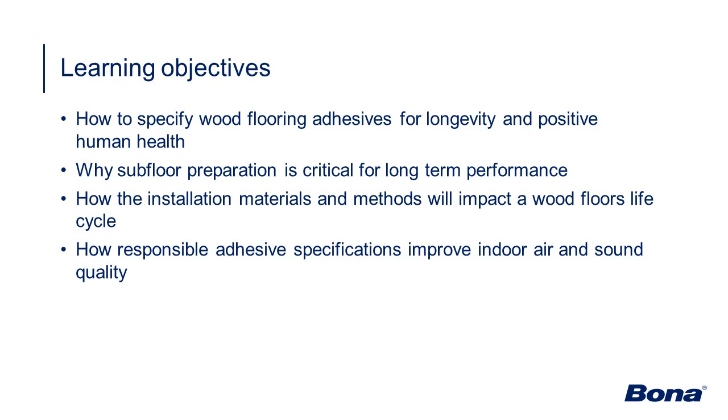So, whose procedures do I follow? The Wood Flooring Installation Guidelines, or the NWFA guidelines. The National Wood Flooring Association is an international nonprofit trade association representing all segments of the hardwood flooring industry. As a matter of fact, they just changed their installation guidelines in 2019. I think they're up to 180 pages now. Most adhesive manufacturer instructions are maybe 1 to 2 pages.

So who defines what's proper and who's to follow? Anytime that they're not in concert, the manufacturer guidelines always trump the National Wood Flooring Association guidelines. And in any case, proper preparation coupled with proper installation materials yields proper positive results.

So we're going to talk about moisture and moisture's effect on hardwood floors. And no matter where you called in from today, flooring can be successfully installed. It's perhaps maybe just in a different manner. The challenges of a flooring project in Florida might be completely different than the challenges of a project in Arizona.

If we're dropping wood off in Florida to acclimate, it's likely we're trying to wait till the moisture content in the wood comes up and becomes higher. If we're dropping the floor off in Arizona to acclimate, it's also likely that we're leaving it on the job site so it comes down in moisture before it's ready to be installed.

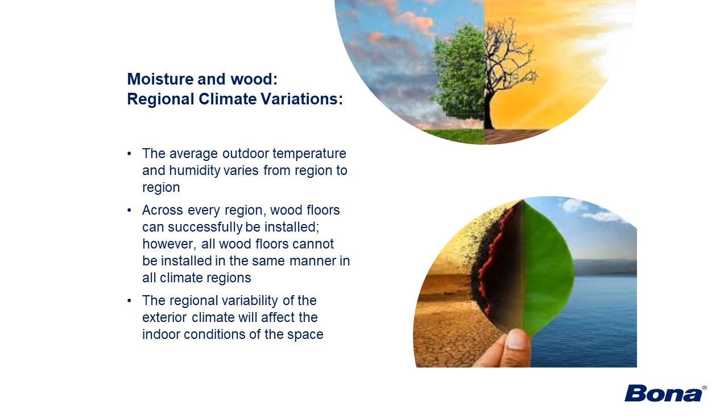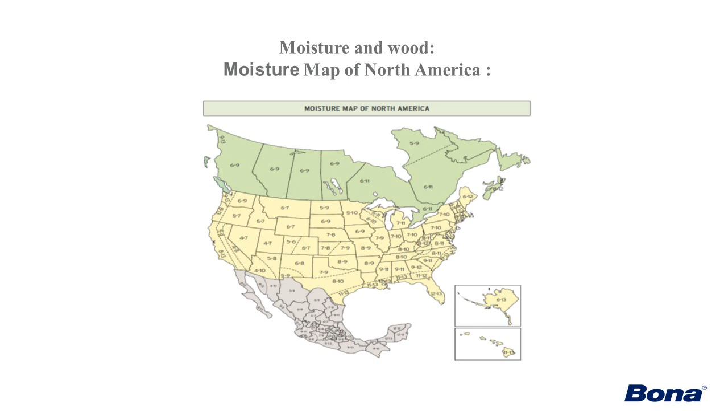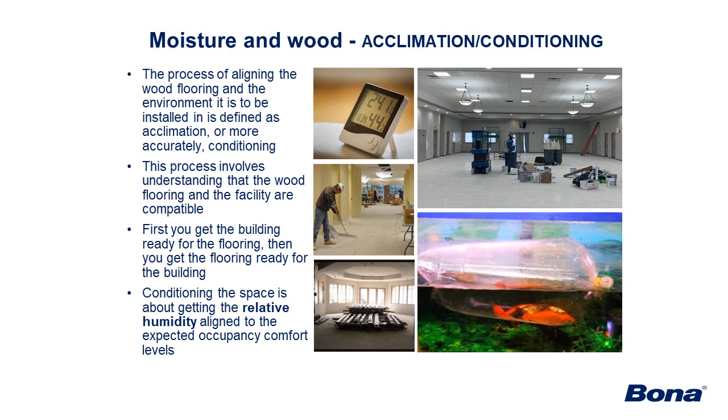I've seen sometimes job sites that are 1,000 square feet and not acclimated at all. So, and by the way, acclimation is not a time thing; it's a science thing. Some people say, well, I let it sit in there for 3 days, or 5 days, or 7 days.

I talked about the National Wood Flooring Association's guidelines. It's about 180 pages. I actually think this is perhaps the most important page. The ideal moisture of wood flooring will be the moisture content at which the wood reaches equilibrium with the installation environment. At this equilibrium, moisture content will stop absorbing or shedding moisture, which prevents some of the physical problems that can occur in wood flooring.

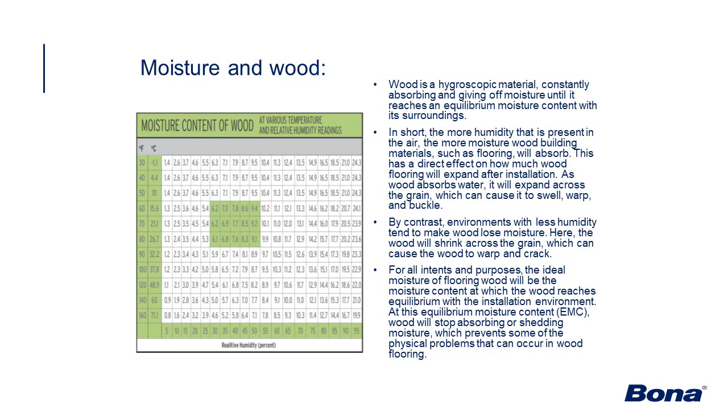So in every market, we're looking for that temperature and relative humidity sweet spot where the wood is going to live comfortably. And that's called the dimensional change coefficient. Every species is assigned a dimensional change coefficient. In other words, maple certainly does not expand and contract at the same rate that oak does.

Brazilian cherry flooring moves dramatically different than say, a walnut floor. But we can determine now, depending on the species of the wood and the environment we put that species of wood into, what it's going to do. And by looking at the dimensional change coefficient, we can determine that if we put it into a room with 62 degrees temperature and 48 percent relative humidity, what that floor will actually do.

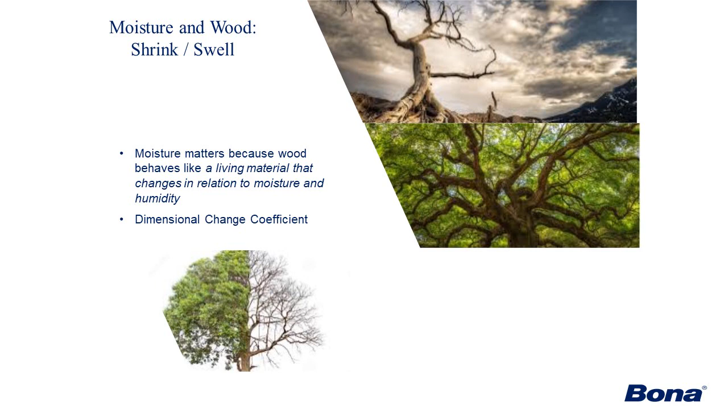Moisture in wood. So never install a wood flooring over a known moisture condition. It is compulsory practice to always test for moisture regardless of conditions, so that the unknown condition can then become a known condition and can be handled appropriately.

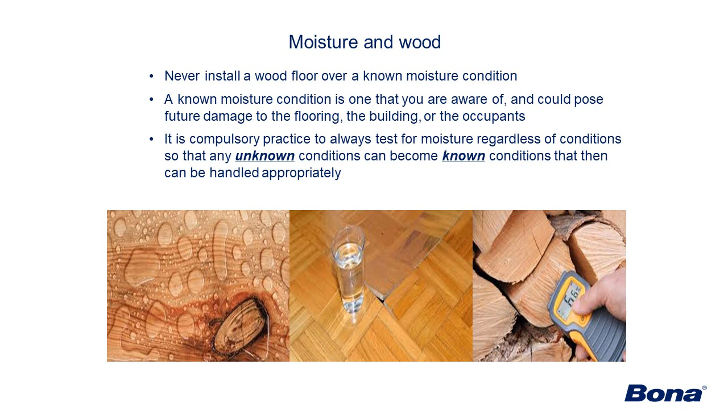I made a living as a contractor, and I tried never to break 2 rules. One of those rules is, if my eyes don't see it, then I don't believe it. And number 2 is never rely on someone else telling me the conditions have been checked and you're good to go. One of the reasons for that is I used to be a construction worker. I used to be a union laborer.

And every day I showed up to work and we placed concrete. So we would have the concrete forms, and we would put the 6 mil visqueen down, and on top of that, the rebar would go. The problem is, let's say it's been raining for 3 or 4 or 5 days before that. We would take rebar and we would poke holes in all that visqueen to let the water run out. Now, it wasn't malicious. We didn't know what we were doing. We didn't know what the effect that was having on the project, but it made our life easier.

And that concrete, when it may have left the concrete yard, may have been spec'd a certain water to cement ratio, but not by the time we got done with it. Because if you ever labor, you work with concrete, and you see it coming down the chute, and it's hard and it's stiff and it's difficult to move, we would jump up into the truck and take the water hose and squirt water into the mix. Now, that made our job a whole lot easier. It's going to slide down the chute a lot easier. It's going to be easier for us to place the concrete, but we've now just taken that concrete and made it very porous. And the hardwood floor contractor would have no idea.

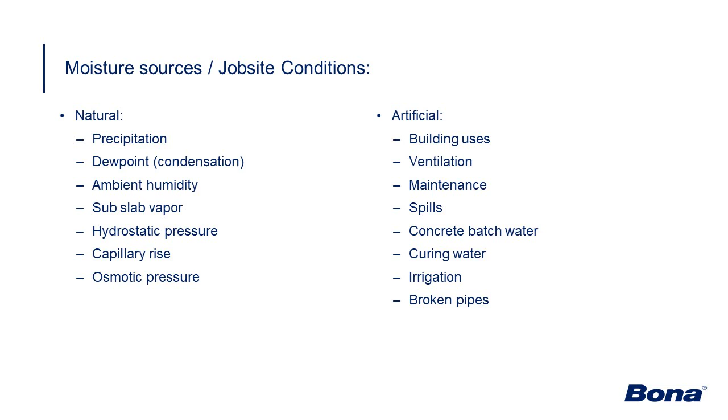So, consequently, I approach every slab like there's contaminants on it and the moisture is too high. That slab needs to prove to me that it's not going to cause my project to fail. And that mindset is the one that I took with me throughout the years in this trade.

So let's see, there's a lot going on under the surface. If you ever see a duck floating down a river, it looks very tranquil and peaceful, but as we know, there can be a lot going on underneath the surface.

Unfortunately, when it comes to subfloor prep, it can kind of fall into a gray area. The GC doesn't have it in the budget or the time, or sometimes it falls to the flooring contractor, who might resent the fact that it was supposed to already be done. Now it's going to come out of his pocket.

So I've even seen guys go back to the GC and say, this floor isn't flat like it needs to be, we need you to fix this, and have them actually make the condition worse. And I always think to myself, can you imagine if they approached hanging doors or installing crown molding the way they did subfloor prep? For us contractors, sometimes what they give us to work on is mind-boggling.

And after all, if a door doesn't hang right, or if the crown molding isn't quite right, it's not going to be near as much disruption.

My father-in-law was the flooring contractor for 52 years, and he would tell me when he's bidding jobs and talking to the building owner or the general, as he's walking around talking to them, with his feet he's feeling for every little undulation in that slab.

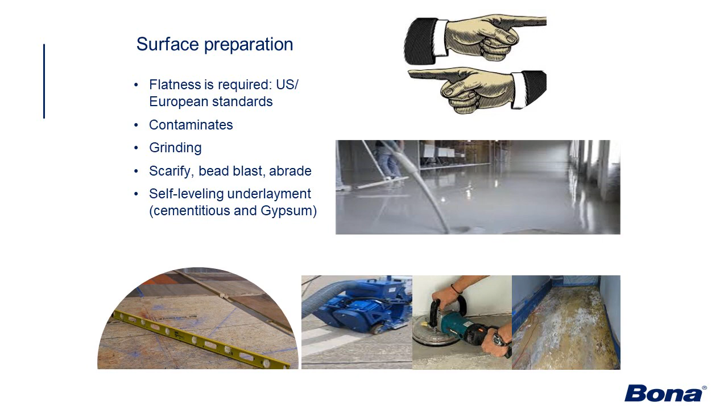He told me he was so good that he could step on a mosquito and tell me whether or not it was circumcised. Now, I don't know if I'll ever get that good, but I certainly got his point.

So there's two types of testing. There's qualitative testing, and there's quantitative testing.

Over the course of my career, I have heard the following things. You know what, it smells dry, it should be good to go. Or the slab looks dry, so we're in good shape. Or, it's old enough to be dry. And my favorite, all-encompassing: I can always tell.

There was a time that we didn't have quantitative testing, that we didn't have the tools that we have today. And so certainly technology has moved us along, and I think we should take advantage of it.

There's two tests that the NWFA recognizes: one being the calcium chloride test, and the other test being the relative humidity test, the RH test.

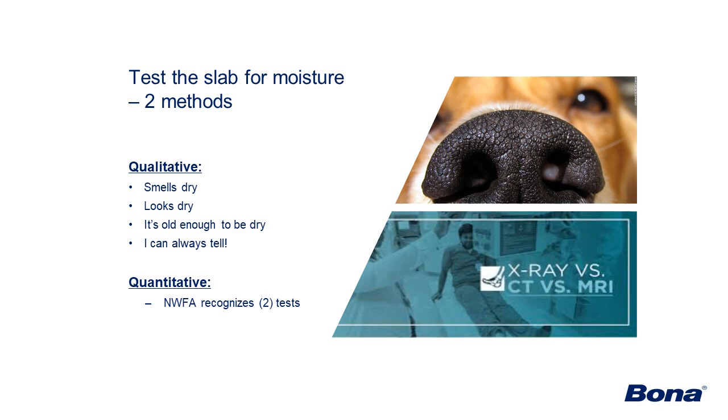Be aware that, in my opinion, the calcium chloride test is more like an X-ray, right? It shows you a little bit what's going on. A much more thorough test, because you're drilling in 40% the depth of the slab, is the RH test. And the RH test is a much more accurate test.

And now, by the way, the test results used to take 72 hours, and now they're down to 24 hours to get the test results back.

So all I'm going to say here on this slide is this: the GC needs to get the job to come in on time and under budget. The flooring contractor is equally under the same amount of pressure to complete the project. And the building owner, well, he or she, all they want is a trouble-free floor.

And for these reasons, in my personal and professional opinion, I think sometimes the testing is better off being done by a third party. I mean, they don't have a dog in the fight.

And after all, when the slab is high, you're left with just a few choices, and most of those are bad. One, you can cave to the pressure and roll the dice, and hope you don't get that call 3 months, 6 months down the road that the floor is cupping. Or you can delay the job.

And I've lived in the real world, I know what that's like, the expectations that are put on us, and the trades coming behind us, and this is your window of time, and this is where my schedule is. I can completely understand those concerns and struggles.

Or you can use a moisture mitigating adhesive that can handle the amount of moisture on the job site, and use a moisture mitigation plan.

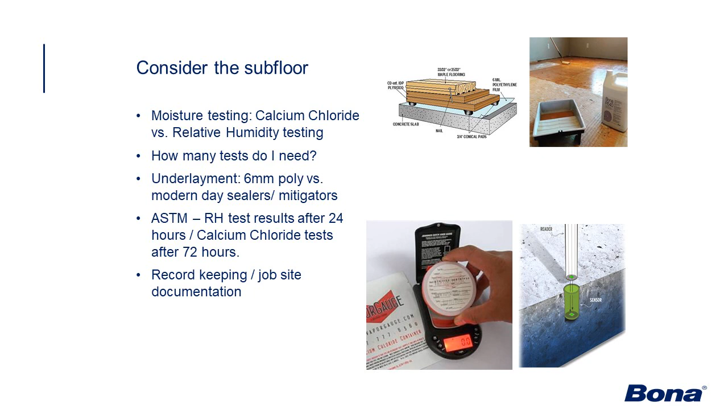So the impacts of moisture on wood flooring. If you've ever seen a gym floor go south, it's amazing the power of wood flooring. So knowing how to repair and install flooring is as important to the safety of the end user as it is to the longevity of the flooring.

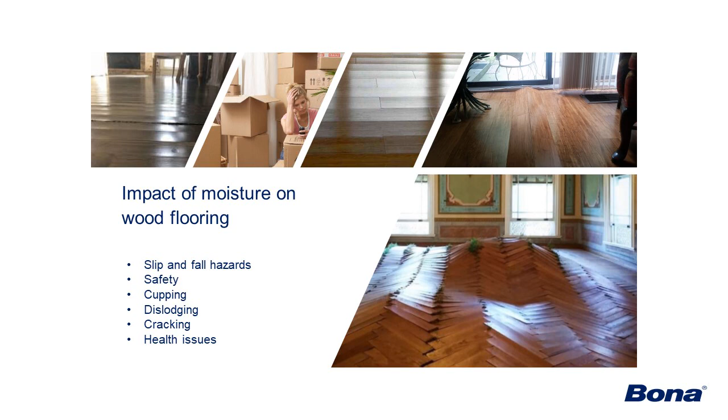Slip and fall hazards increase with floor failures, cupping, dislodging, cracking, all these things that are related to improperly installed flooring or poorly prepared slabs. And that's not even to mention the economic disruption and possibly the health disruption and issues with mold and what have you.

So, why do adhesives matter to your project? I've heard people say, well, the adhesive I used on the last couple projects worked just fine, so I don't know why it failed on this one. It could have been that the conditions had been such that it could handle the moisture on those last two jobs, but it didn't have the firepower to hold the moisture on this one because of the elevated moisture conditions. I have a colleague, and I showed him this slide, and he says, yeah, you need to pair the right adhesive with the flooring material, and that's critical.

Like Chianti goes with pizza and Pinot Noir goes with barbecue. I don't know what he was talking about because I don't drink wine, but I get his point. And also, being in the industry for a while, I hear guys say, well, the wood flooring is still alive.

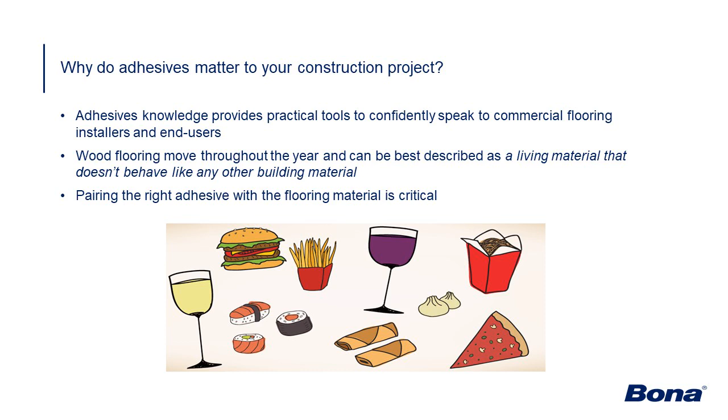It can still take in moisture. And actually, that's not true. I mean, if you chop a tree down and you kiln dry it and you shape it and turn it into a door, it's not a tree anymore. It is actually dead. It's a door. It just behaves like it's alive. So going back to that slide with equilibrium I mentioned earlier, we want it to be in a healthy environment, and the adhesive is one of those critical components to the environment.

Health issues of wood flooring installation. We build these buildings so fast now, and we close them up so fast and so tight that there's a lot of moisture trapped inside these buildings. Certainly one of the concerns, and we're seeing it more and more with people. We're working in these buildings longer and spending more of our life in these buildings, and the indoor air quality is a huge concern.

Bona 851 adhesive is zero VOCs, and it's GREENGUARD certified. And it took a lot of technology for us to do those things without compromising some of the other features of the product.

Certainly sound transmission also is a big concern if you've ever been in a building with really poor acoustics. So you might be familiar with LEED, WELL standards also. The WELL building standard is a performance-based system for measuring, certifying, and monitoring features of the built environment that impact human health and comfort.

So as I said when I started this presentation, floors usually account for more surface area than anything else in the house except perhaps the walls. So they do have an outsized effect on indoor air quality. We spend a lot of time working on them, playing on them, living on them, and we do breathe everything that they emit. People are becoming more and more aware of that. Since flooring takes up thousands of square feet, large quantities of raw material are also involved, and so those impacts should be considered as well.

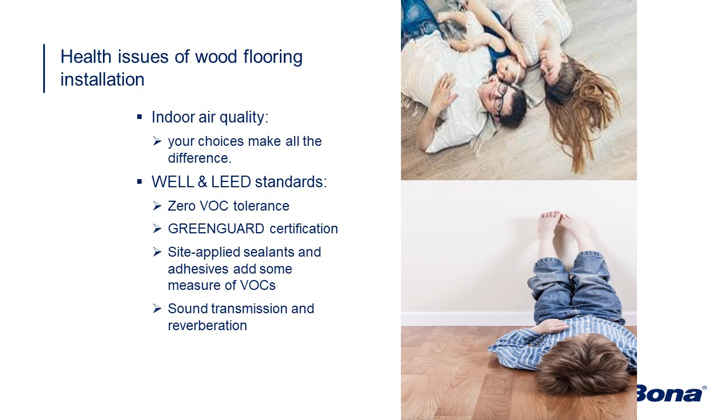But by selecting the right adhesive, you can maximize the quality of your indoor environment and minimize the damage to the environment. So let's see here, I skipped a slide. I'm going to go back one here.

Okay, so not all adhesives are the same. I talk to architects all the time, and a lot of times what they'll do is they'll go back and use a boilerplate spec from maybe they've been using 5 or 10 years ago because maybe it's easy to cut and paste or it's a name that they remember.

Construction practices have changed in the last few years. The changes in flooring and material has changed dramatically. And of course, fast-paced construction has changed the game. We are putting floors now in environments we never asked to put them in before. We are placing greater demands on our adhesives. They need to be zero VOCs and GREENGUARD certified.

We're putting in plank floors. I was in Cincinnati, I think about 3 weeks ago now, and the project had 20-inch wide floors in it. I mean, that was something that was unheard of years ago. But with today's new technology, that's achievable.

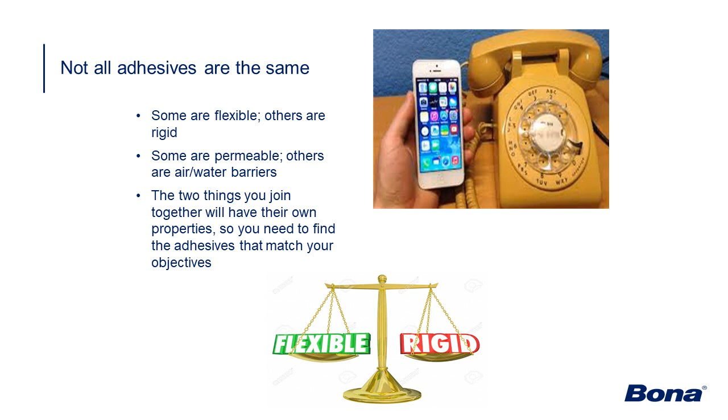So they said, Wayne, you got the job. You're national sales manager. Congratulations.

While I was a contractor, I had made the switch to Bona adhesives about a year and a half before I ever even knew anybody at Bona or talked to anybody at Bona or had any relationships. But when I went to work for Bona, I knew what I liked about the adhesive, and I knew what my guys liked about it. But now that I had to go on this journey, I had to understand, okay, what exactly makes one adhesive different from the other? I mean, at the end of the day, they all stick a board down to a substrate.

So while I was on this journey trying to do comparisons, what I got a lot of was marketing jargon, like it holds really good, or really good with moisture. When I want to do the comparisons, I think aside from the MSDS sheets, there are some things you have to consider in the adhesives: the shear strength, the tensile strength, the elongation, the permeability, and the sound ratings.

Shear strength - when that floor wants to go in motion, when there's moisture coming up and that floor wants to move side to side, it's the shear strength that needs to have the power to hold that floor in place. I talked about the gym floor that didn't have the adhesive, didn't have what it took to hold that moisture down or that floor from moving sideways.

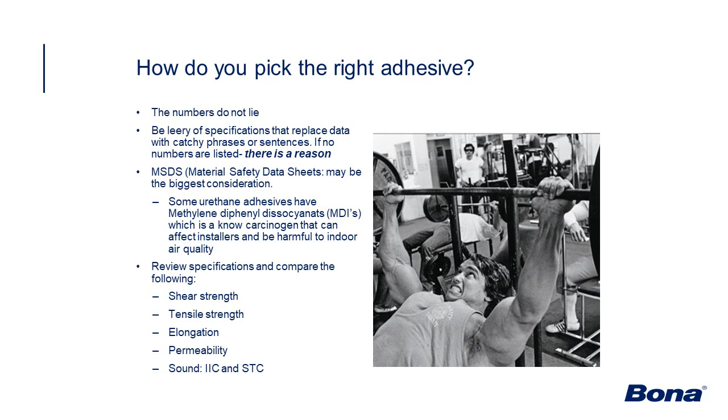So I'm going to go through these next slides pretty quickly. These are properties that, this first one I believe is an engineered floor - these are properties that we would want in an engineered floor. You can see zero VOC is always desirable in any of these, but I'm only going to focus on two of these.

That initially may not sound as important, but I'll tell you why I think they are. One is easy to clean. As an inspector and flooring contractor over the years, I can't begin to tell you how many times I've seen adhesive not being able to be removed after the project was done, and it dried on the surface. Many urethanes will etch the finish, and even if you can get it off, you can look back and see a dull spot on the floor, which equates to now you're looking at board replacement and those type of things.

So the other thing I'm going to focus on is easy to spread. The average age of the installer is getting older and older. Arm fatigue can show up in a few different ways - wear and tear on the installer, but also when your arm is hanging off your shoulders at 2 o'clock in the afternoon because you're tired of spreading adhesive that's hard to move, a funny thing starts to happen to your spread rates. I always thought it would be interesting if you could look at the spread rates in the first few hours of the day versus towards the end of the day when the guy's arms are getting tired and now you're starting to float the adhesive more, and of course your spread rates go down.

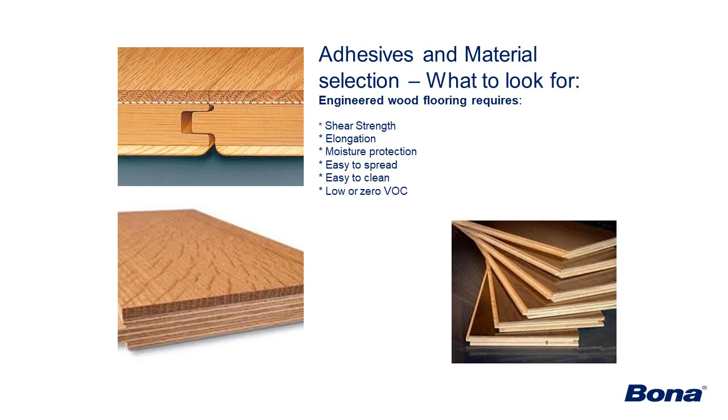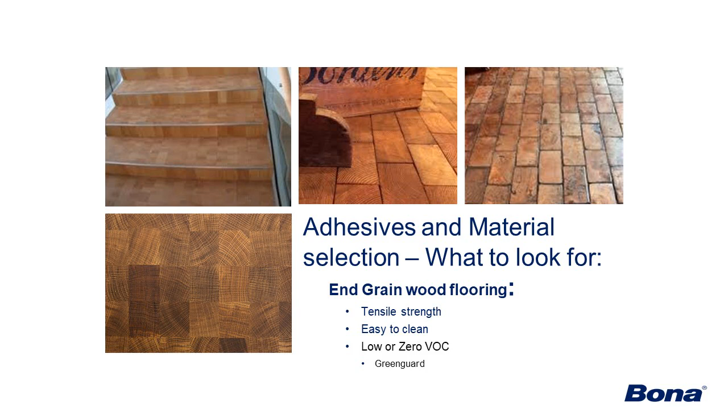End grain blocks - I talked about how important tensile strength is to this type of flooring, and I'll go through these quickly here. Wide plank floors, again, we're looking at longer and longer floors, putting more stresses on the adhesive, and with today's technology, and I'll get into that a little bit later.

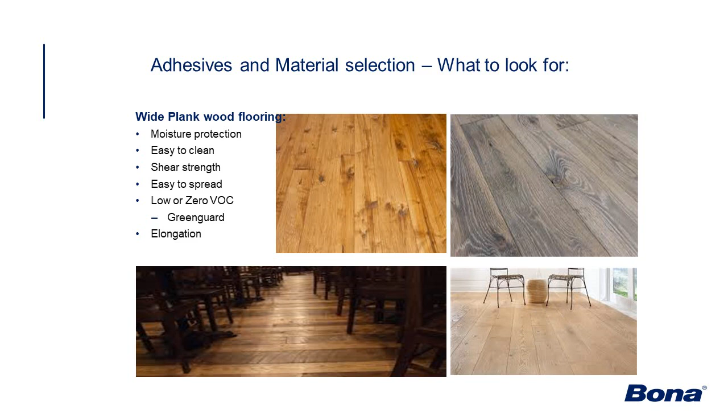America, thank God, has always had a love affair with wood floors. They add warmth and beauty, almost a tranquil feeling to any building, and that's why we're starting to see them in more places that we didn't see them in the past. Now they're moving up walls and onto ceilings.

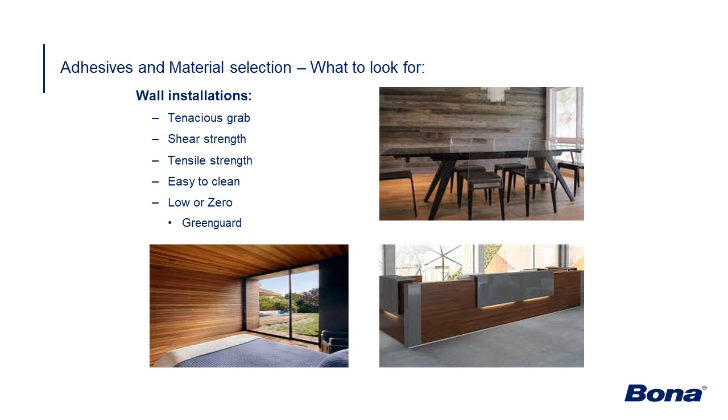We have a product called R880, and the feature you would want in that is something that has tenacious grab—grabs real quick, grabs real fast, and has great shear strength. So that's another quality of adhesives.

Now you have to look at material selection for the substrates, because it not only has to get along with the flooring, but also the subfloors underneath. We've got concrete, plywood, gypcrete, gypsum underlayments, OSB, and Advantech.

If you're installing floors on wood subfloors, the National Wood Flooring Association says you need to be within 2 percentage points in moisture from the finished floor to the subfloor. Now, it's very hard to get optimum conditions to install flooring, especially on these commercial jobs.

So guys will put building paper down. In today's fast-paced construction, I can tell you from experience, if that subfloor is high, it's likely that floor is going to cup.

Bona came out with a product called Bona R540. It's a one-component, roll-on moisture membrane, specially designed to mitigate vapor transmission on absorbent and non-absorbent subfloors, including gypsum-based underlayments. You roll out one coat, and now it protects you up to 20% moisture. That is a game changer.

My family's been in the business forever, and most of my friends are flooring contractors. We had this product out in Europe for quite some time, then brought it over to America, and it has just been fabulous for us and very well received.

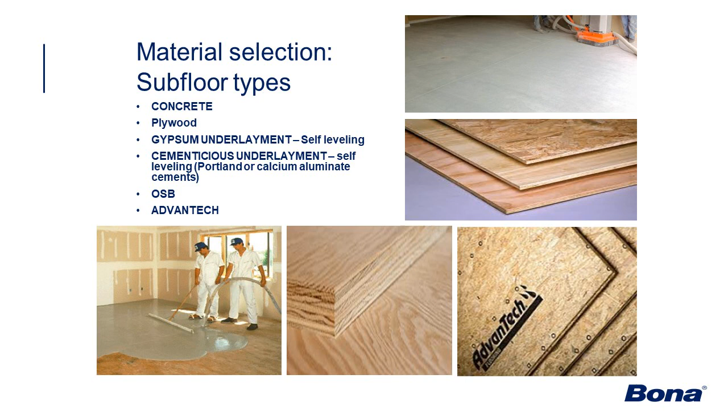You do not need to use building paper if you go over top of it. If you're only going to install the floor and you're not going to use adhesives, you only need to wait about an hour or so before you start installing over top of it.

OSB. OSB is kind of a different animal. It does not handle seasonal changes very well as it relates to holding fasteners.

In 2018, the National Wood Flooring Association had their seminar at one of their conferences, and the most widely attended seminar was on popping, squeaking, creaking hardwood floors. Now, we've gone to engineered floors because they're more dimensionally stable—we can sleep at night, they don't move quite as much. But the NWFA has had a spike in calls on these issues.

Guys installing these engineered floors with floor runner staple guns, using thin gauge staples, leave the floors vulnerable to squeaks. Keep in mind, the industry trend is wider and wider planks. The wider the plank, the less fasteners per square foot, when really the opposite is what we need. It's a long way across these plank boards to rely only on the engagement of the tongue and groove on one side and the fasteners on the other.

It leaves you vulnerable to lateral movement, which in turn leads to squeaks. And that's why you're seeing more nail glue assist installations.

So imagine you put in $60,000 worth of pre-finished flooring, and that looks great. The guys staggered the boards real nice and everything, and here's your check—thanks very much, it's a great job. And then only to get that call back a few months later that the floor's starting to squeak or pop. I can tell you there's nothing that comes out of our mouth that's going to make them feel any better about it.

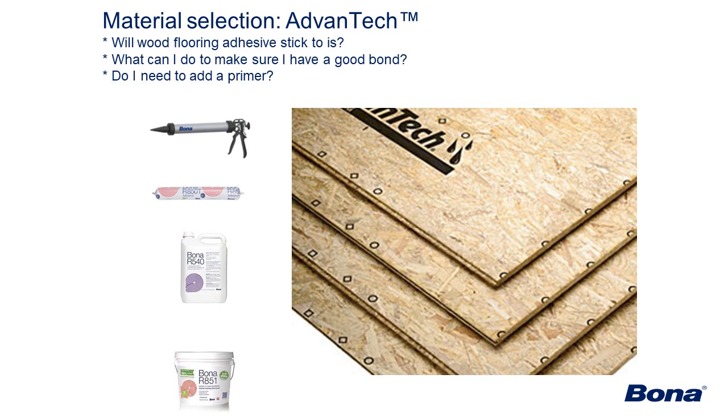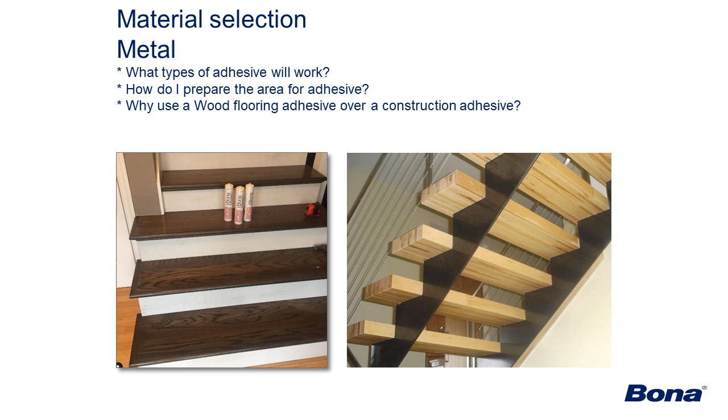And then gypcrete. We play very well with gypcrete. In fact, with Bona R851 silane adhesive, no primer is needed. So you don't have to spend the money on the primer, you don't have to do the labor on the primer, and you don't have to wait for the primer to dry.

Gypsum-based concrete substrates tend to be very dusty. So even after thorough vacuuming, primers are typically recommended because many types of adhesives don't have the ability to wet out on the dust on the surface, creating adhesion problems. The Bona R851 is the exception. Through extensive testing and Bona research and development, we've concluded that abrasion and thorough vacuuming prior to the 851 is all you need to do.

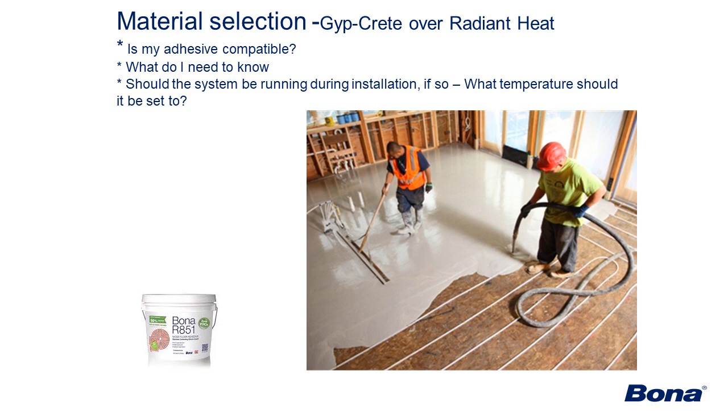Silane adhesive does not etch plastic tubing on radiant heat. All I tell people about radiant heat is don't turn it off. I don't think it's ever a good idea to turn radiant heat off. Better to turn it down to, say, 70 degrees, which may shorten your open time a bit. But if you do have to turn the radiant heat off, turn it back on in very slow increments so you don't shock the floor.

Warm board, we're also approved for warm board. We're compatible with that. And then the rubber. So many builders have determined that they do not need to do a double stick when using the Bona silane adhesive, because our IIC and STC ratings on the adhesive are enough to meet the sound requirements.

That is a huge cost savings in labor, material, and time. However, if they do elect to use the rubber or the cork, we adhere very well to these too.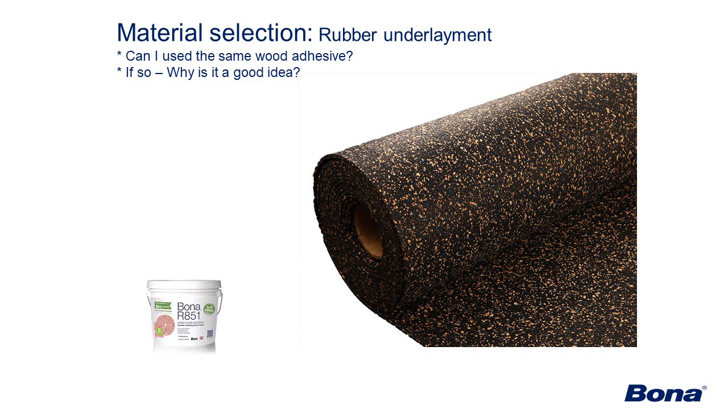I've talked to people who say, from the concrete to the rubber I'll use an inexpensive adhesive, and from the rubber to the flooring I'll use the better adhesive, when actually it's better practice to use whatever adhesive you use under the rubber on top of the rubber too, so the shear strengths aren't fighting against each other or one doesn't overwhelm the other. Same thing with cork here.

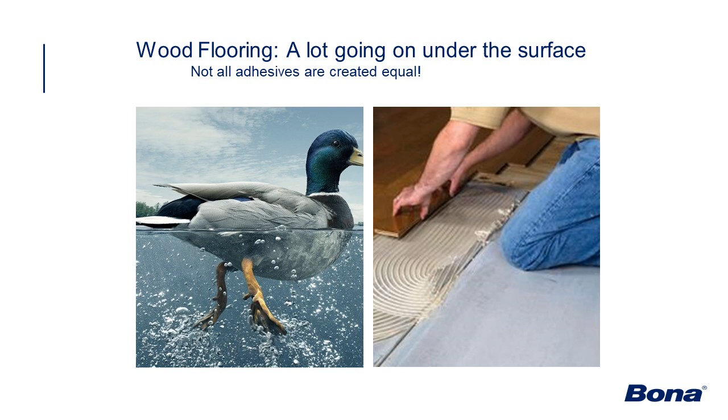So here's our duck again: not all adhesives are created equal. So we can talk about some of these things.

Thank God for urethanes, because they kind of got us out of the Stone Ages. Before that, guys were using tar and screeds. However, in some areas of the country, they're still using tar and screeds, like down in Texas and around the Houston area.

I don't think there's a debate anymore where the industry is going. 9 out of 10 adhesive installations in Europe are installed with silanes. And silane is a form of silicone. Silicone is a moisture rejector and adhesive promoter. Per square foot, you'll use less adhesive with a silane to get the moisture protection than you will with urethane. And then you're going to have the added benefits of that.

It spreads so much nicer, it cleans up, and tremendous shear strength. I didn't talk about waste. One nice thing about our adhesive, you could open up the pail, use half of the adhesive, put the foil back on, put it back in the van, come back a month later, open it back up, and there's almost no skin over, and what skin over is there comes out very easily.

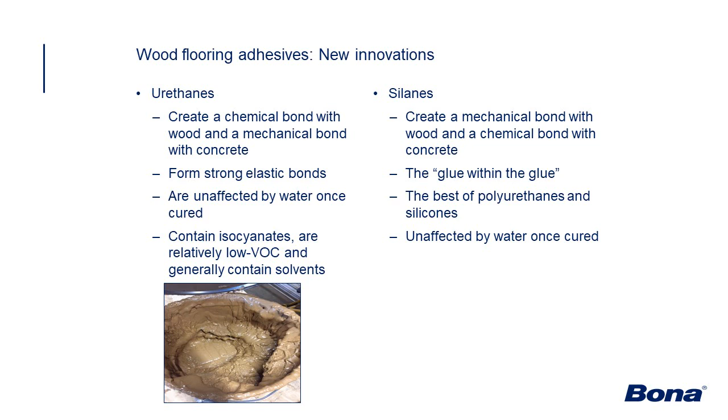So, on a slab, a urethane adhesive creates a mechanical bond, and silane creates a chemical bond. A chemical bond is when molecule A combines with molecule B to form a new molecule altogether. And some people will say, well Wayne, isn't a silane kind of like an MS, a modified silane, MS polymer? And that's really not the case.

Just for a little background, in 1976, the Japanese company Kaneka produced the first resin, filed a patent, and I can't even begin to pronounce what that was. But that patent is the basis for what is known today as MS polymer. Silane adhesive formulations do not use that Kaneka patent, and they're considered silane terminated polymers. But now most terminology, most people accept it as silanes.

Trying to explain the difference between the two of those. Usually, with a silane, you're going to get better moisture protection and shear strength with the silanes. This is with the newer technology.

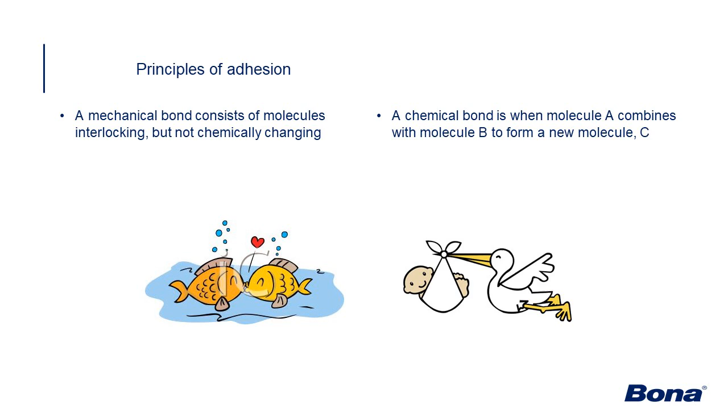So, how do you pick the right adhesives for sound control? I talked about being in a building with really poor acoustics and how that impacts the environment long term. Suppressing that sound is incredibly important. It's important in custom residential homes. It's important in office buildings and multifamily buildings and condominiums and where businesses are. And we have an excellent IIC and STC rating.

The tradesmen came in one particular year, and they didn't have the right adhesive, so they used a silicone caulking for board repairs. It was kind of a light bulb moment for the industry, and actually the genesis of Bona's technology. In America, Bona is known more as a finish manufacturer, but in Europe, in Europe, Bona is more well known as an adhesive company. However, in America, we make all our adhesive now in Monroe, North Carolina.

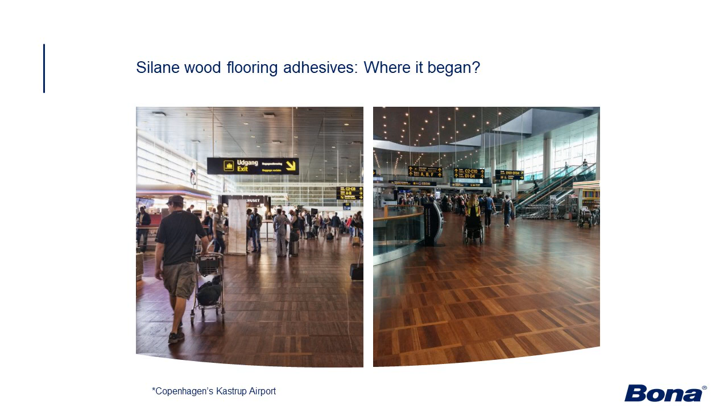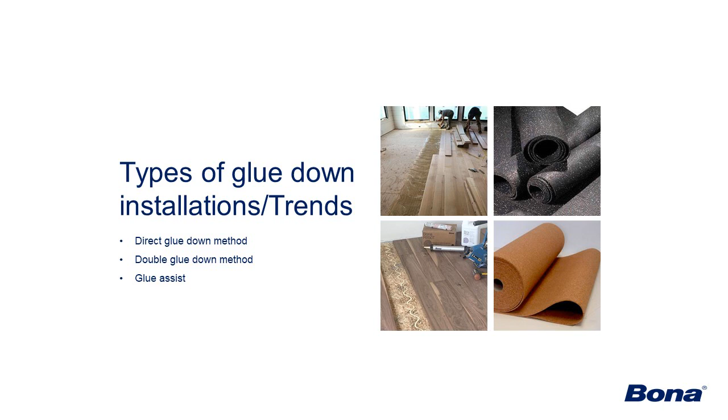Type of glue-down installations, I kind of talked about these already, so I'm just going to bypass this and go to the trowel. Now, the trowel is nothing more than a measuring device. That's what a trowel is. It's a piece of metal with a wooden handle usually and with notches in it, and the only thing it does is it's a measuring device.

I'm going to sound maybe like a bit of a hard ass here, but when I was a contractor, I would send a guy home for using the wrong trowel. And the reason being is I saw a $12 trowel cost a guy $90,000 in repairs. They had an issue with the floor, the inspector came out, he brought out his calipers, he determined that the wrong trowel was used on the project, and that was the end of the story. So I think it's very important - this is a sidebar on the trowels.

And then we'll talk a minute about warranties. So, this is also my personal and professional opinion. Let's say I think that unlimited warranties can sometimes set contractors up for failures.

In order to get an unlimited warranty, you need 100% coverage in most cases. I sometimes wonder if the gamble isn't that our adhesive is so good that no matter what the moisture situation is, we can handle it. I think sometimes the gamble is the contractor is never going to be able to meet the conditions to get it, because of undulations in the subfloor and other issues. And then in some cases, that unlimited warranty defaults to a 3 pound 75 RH warranty, which, by the way, is pretty much entry-level moisture protection.

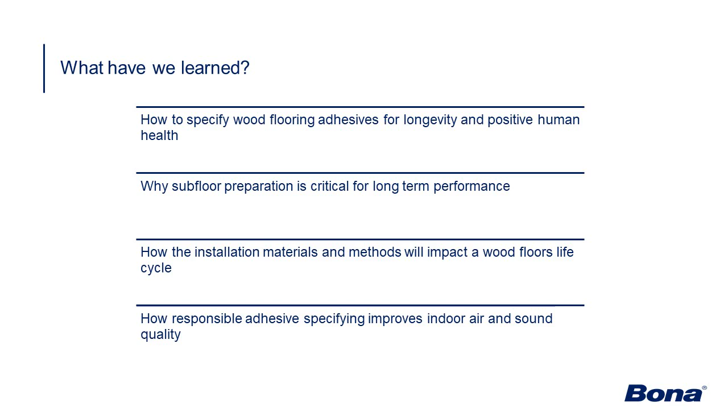So we discussed how to specify wood flooring adhesives for longevity and positive human health, why subfloor preparation is critical for long-term performance, how installation materials and methods impact the wood floor's life cycle, and how responsible adhesive specifying improves indoor air and sound quality.

Again, my name is Wayne Highlander. I'm the National Sales Manager at Bona Adhesives.

I want to say this before I take some questions. A colleague of mine went to the FCICA convention in Nashville a few weeks ago. We look around that room, it's a who's who of great floor contractors in America. We know that, and it was an honor for us to be there. The FCICA did a smoking good job. It was really admirable to see the networking, the education, the camaraderie, it was really pretty cool. So I want to thank you for having us at the convention.